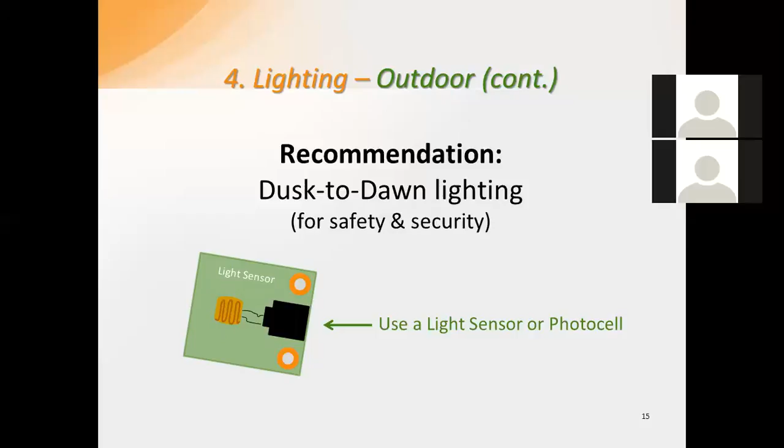Nowadays you can buy outdoor lighting fixtures with built-in photocells and LED lights in many hardware stores, which makes it easy to upgrade. On the other hand, lights used for appearance or informational purposes don't necessarily need to run all night.

Here are some examples of those lights: lights to highlight your outdoor signs, your steeple, your stained glass, which again is beautiful. But if we can conserve the amount that we run them, in my opinion, it makes sense.

We strongly recommend that you control this piece of lighting with a timer, and then adjust the timer. Many of you might have lighting timers, but the thing I see in the field is people, even though they have timers, don't adjust them for time of day changes, and daylight savings time is coming up pretty soon, if I'm not mistaken.

This means this type of lighting rarely needs to be on later than 10:30 at night. Instead of dusk till dawn, you can turn off this type of lighting after a reasonable hour. After you set up your timers, remember to adjust them every few months based on daylight savings time.

So let's see if you listened. I can finally see the chat and the Q&A. Hallelujah.

Question: regarding retrofitting, lights are typically on for 15 hours a day, more than 15 hours a week, or more than 15 hours a month? Let's see if you guys have been listening or if anybody fell asleep. Good job, B, 15 hours a week, you were listening.

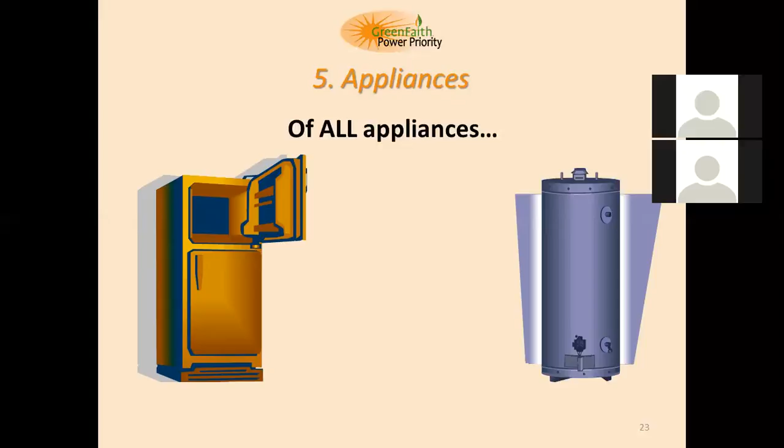Among all the appliances in your buildings, it's your refrigerators and your water heater that will provide the greatest opportunities for energy savings. Which of these is more critical will depend on your facility, specifically how many units you have. For instance, some congregations here in the United States have food pantries, and in that situation they'll probably need half a dozen or more refrigerators to store all that food. So for them, refrigerators would be the critical appliance issue to address.

All right, so now let's first talk about refrigerators. They are such a significant energy user in faith-based institutions because they're running pretty much all the time, 24/7. One of the most important things you can do with your refrigerators, if you have more than one unit, which is often the case, is to consolidate the contents into just one refrigerator or as few refrigerators as possible, and then shut off the others until they're needed again. This very simple action will save you a lot of energy.

All right, here's another tip to help your refrigerators work more efficiently. The first thing you want to do is make sure to move them away from the wall, at least 3 inches away.

And then you would want to vacuum the dust from all the coils and vents every year. The reason for this is simple: refrigerators dissipate their heat through the coils in the back and bottom of the unit. When you keep those clean, you provide more airflow, and the heat can dissipate more easily, so it operates much more efficiently.

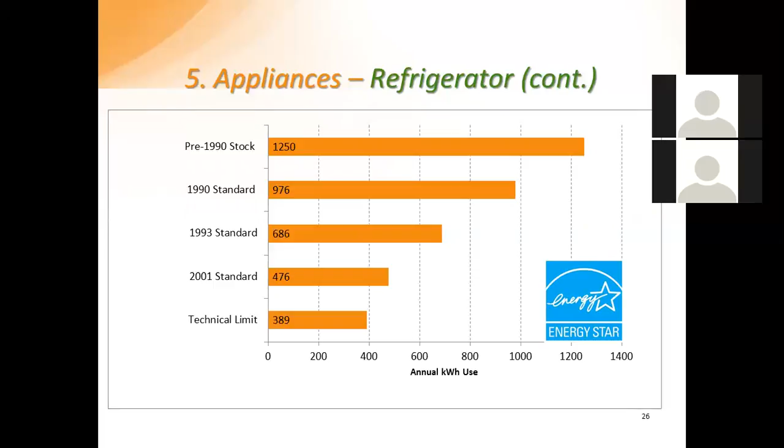All right, so now let's talk about your water heater. Water heaters also use a lot of energy because they run all the time. You may not realize that, but they're constantly turning on and off to keep the water at a constant temperature. We're going to look at two strategies you can use to save energy with your water heaters.

The first thing to look at is the temperature setting. What we find is that in many, many congregations, the water temperature is simply set too high. Our recommendation is that you should keep the temperature no higher than 110 degrees. There are a couple of exceptions to that rule, though.

First, some congregations may provide showers, and if that's the situation, you would want to keep the temperature at 120 degrees. Many churches also have preschools, and there may be specific state regulations you have to comply with, so you need to find out what those are. But for everybody else, the recommendation is to lower the temperature of your water heater, and that'll save you some money.

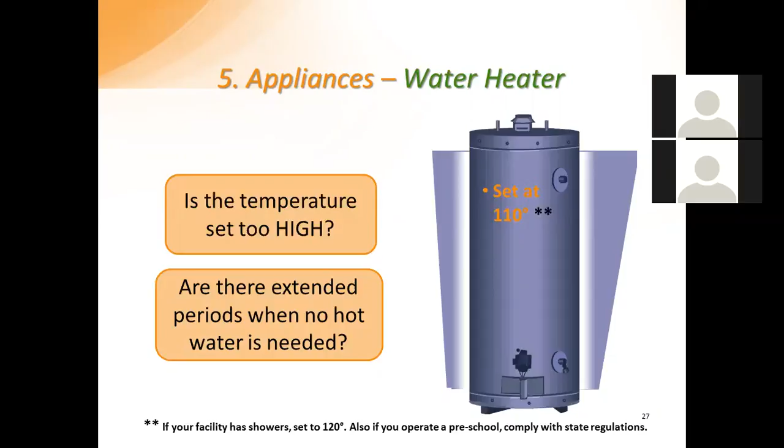The other trick is to use vacation mode whenever you can. We find that quite a few religious facilities have days during the week when they don't really need hot water, because there aren't a lot of people using the facility. If that's the case, you'd want to put the water heater on vacation mode during those days, say Monday to Friday, and then turn it up again for the weekend when people come for services and there are more people using that hot water.

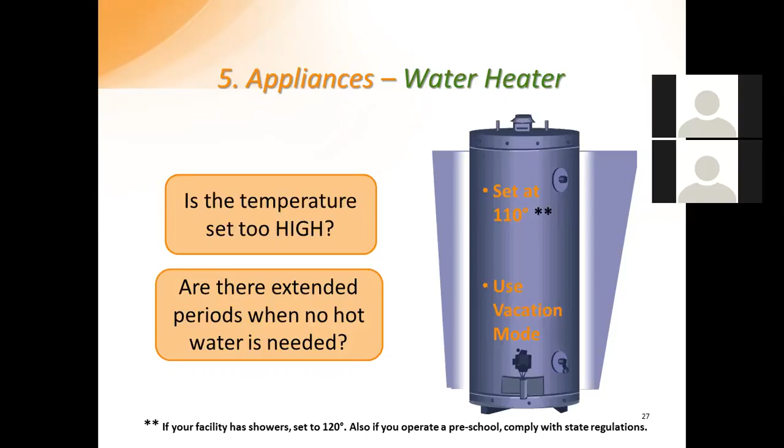The third issue to look at with water heaters is the size of your unit. Is your water heater 40 gallons or larger? We see that quite a bit at houses of worship—some have 80-gallon water heaters, which is typically unnecessary because the need for hot water is fairly limited. The reality is that you probably only need a unit that's about 15 to 30 gallons.

If you have one of those bigger units, you might want to consider replacing it with a smaller water heater. Or the other option is to install an on-demand, or tankless, water heater unit. These units only heat the water when it's really needed, and a lot of times they're very small and located close to the point where you need the hot water—for instance, under the sink in your kitchen. And these really work very effectively.

One of our colleagues at GreenFaith installed a tankless water heater at her home, and she said she saw very substantial savings on her gas bill. So they really do the trick—they do save you a lot of energy on water heating.

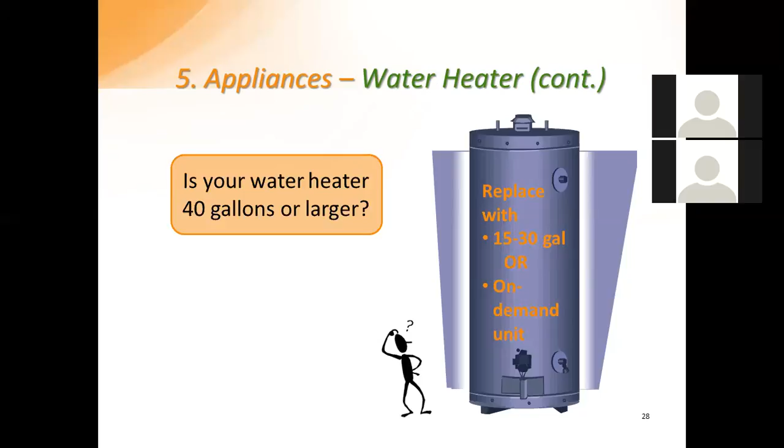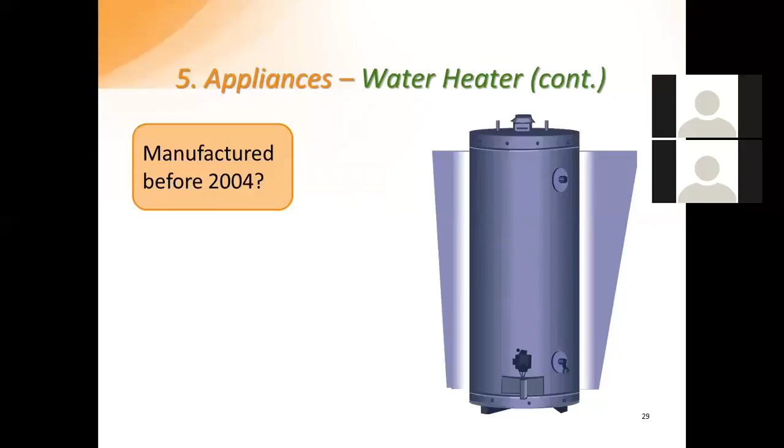And then there's a couple of other suggestions we want to make regarding your water heaters. If you happen to have a water heater that was manufactured before 2004, you'd want to cover it with an insulation blanket. Those blankets you can find at pretty much any hardware store. Newer water heaters have already insulated tanks, so this strategy is not necessary for those.

But our other suggestion applies to all water heaters, and that is that we recommend insulating the first 3 feet of the heated water out pipe. This is especially important if your water heater is located in a cold, unconditioned space, so it has to work a lot harder to keep that water hot.

The purpose of both of these strategies is basically to make sure that you're not losing too much heat from your water heater to the surrounding area, so you keep that water as hot as possible and maximize the efficiency of your unit.

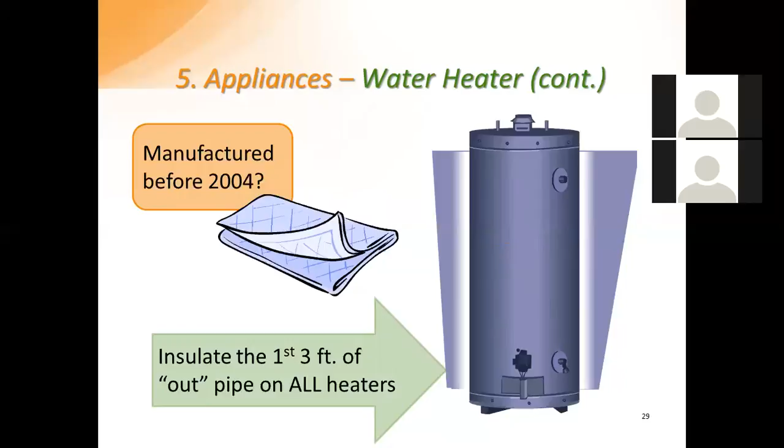All right, so now let's move on to the last appliance topic, and that is vampire load. I wonder if you know what vampire load means.

Basically, it's the electric power that is used by some appliances when they are in the off or standby mode. A very good example of vampire load is our phone chargers. Your phone charger is plugged into the wall, and it may be warm, and you may see that charging light burning even if it's not connected to your phone, so it's not really doing its job. This is a sign that the charger continues to draw energy from the plug even though it's not connected to the phone and not doing the work it's supposed to do.

And of course this is a problem because it can really add up over time. The USA Department of Energy estimates that a whopping 75% of the annual electric power used for appliances is actually consumed when those appliances are in that off or standby mode. That costs us $4 to $8 billion annually, so that's a pretty substantial footprint for vampire load.

So you might ask, is there anything we can do to avoid this? What would be the solution to avoid vampire load? I'm not going to ask you to answer that in the chat box because unfortunately I'm not able to see your answers, so I'm just going to continue.

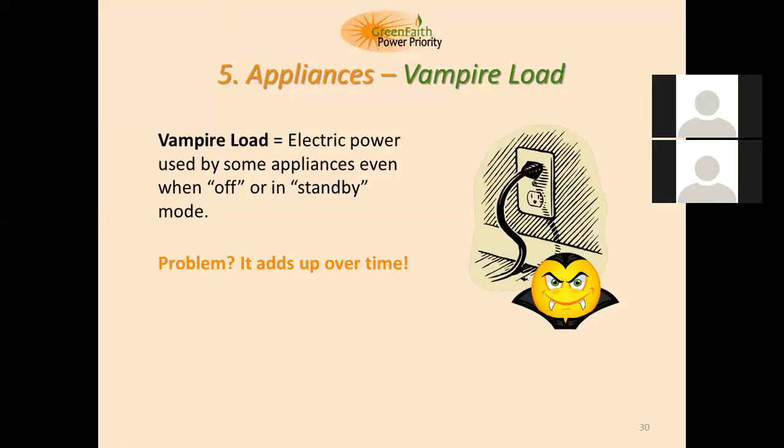Maybe you might have guessed the response, but the right answer here is that we can use power strips. The benefit of using power strips is that you can plug multiple appliances into them, and then turn them all off by simply flipping that one switch, turning all of the appliances off at once.

Power strips are really great in areas of your building where you have clusters of equipment, and we would recommend them in your administrative offices, both for your staff and clergy people. In your admin offices, you probably have a lot of computers, copiers, printers, fax machines, and stuff, so power strips make a lot of sense in those spaces. They may also be good in your kitchen to control your kitchen appliances, and sometimes also make sense in your sanctuary, especially if you are using a lot of audio equipment during your services.

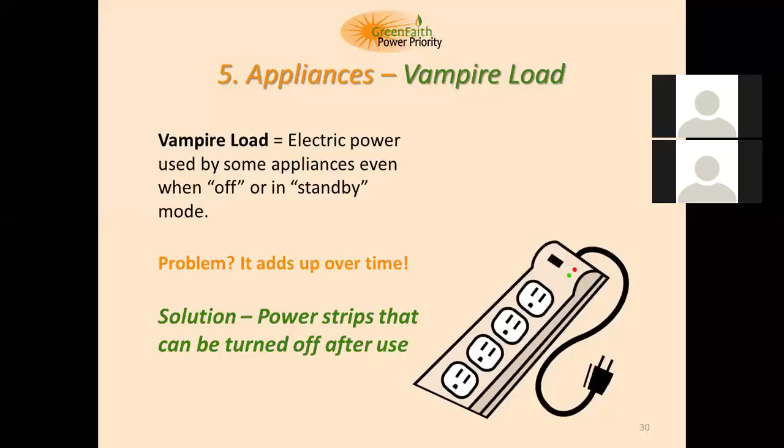Before we finish talking about appliances, I'm going to talk just briefly a little more about Energy Star certification. When Colby talked about LEDs, he talked about Energy Star and recommended that you all buy Energy Star rated LED bulbs because they're going to be much better quality and all kinds of good things. This really applies to all of your appliances. You may already be doing this at home, but you should also consider doing this in your religious facilities.

So Energy Star is actually the highest efficiency rating for appliances. We want to favor those appliances that have Energy Star rating because they use less energy, and they do that without sacrificing the performance of that product. So do remember Energy Star appliances because they help you conserve energy, provide cost savings, and those products work really well too.

Okay, so that concludes the appliance section. And we're going to do a quick recap question around this and see what you remember.

The question is: to reduce the amount of energy used by major appliances and office equipment, what are the 3 changes a typical religious institution should focus on first? The options are: A, consolidate contents of multiple refrigerators into fewer units; B, purchase energy-efficient copiers and printers; C, turn down the temperature on water heaters and use vacation mode whenever possible; D, use power strips to turn off computers, office equipment, kitchen appliances overnight; E, use larger, more efficient water heaters; or F, replace older refrigerators with Energy Star models. So just think about those options, and now let's look at the right answers, Colby.

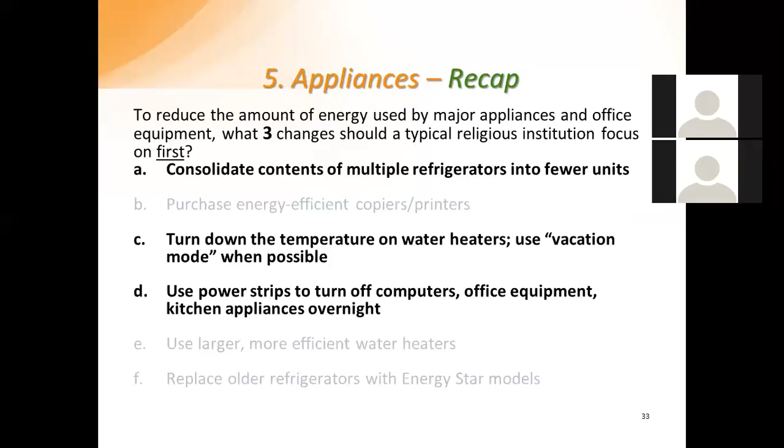Now I'm not going to stop for questions. I think I'm just going to keep going, and we'll have questions at the end. We're going to talk about your building envelope next, and that's really the major last energy savings piece that we will talk about today.

I just want to show the definition of what the building envelope means here. Basically, it's the physical separator between the interior of a building and the outdoor environment. There's a lot of pieces that make up your building envelope—things like your external walls, your windows, your doors, your roof, as well as the floor of your building. We certainly hope you're doing a better job with your building envelope versus what you can see in these two pictures here.

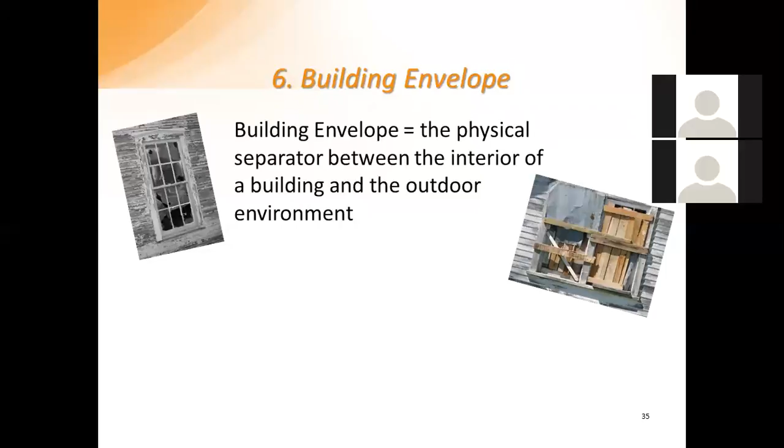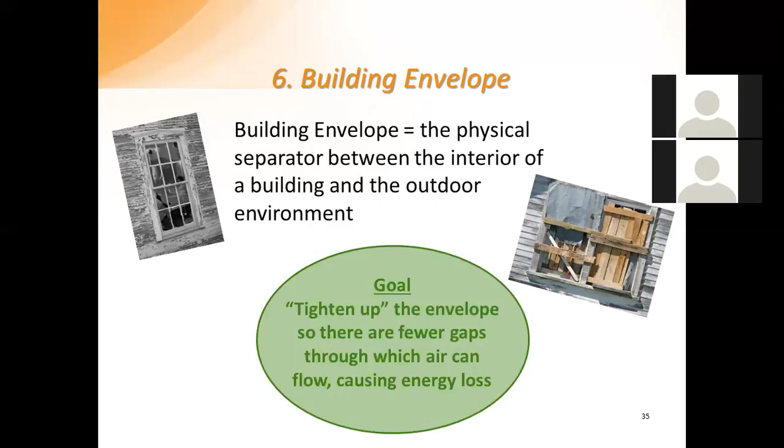But for all of us, the goal is to tighten up the building envelope, so we want to close those gaps through which air can flow, which causes lots of energy losses. So now, what do you think is the top priority for tightening your building envelope in a religious institution? You can think about that for a little bit before we get to the answer.

Well, we know that the answer is not new windows. We get that quite a bit when we talk to religious institutions, especially here in the United States—a lot of them are considering new windows to improve their building envelope. It's not the first thing to do. Certainly, we would not tell you not to replace your windows, but it's probably not the first priority action, because new windows tend to be quite expensive, so they have very long payback and provide a fairly small return on your investment.

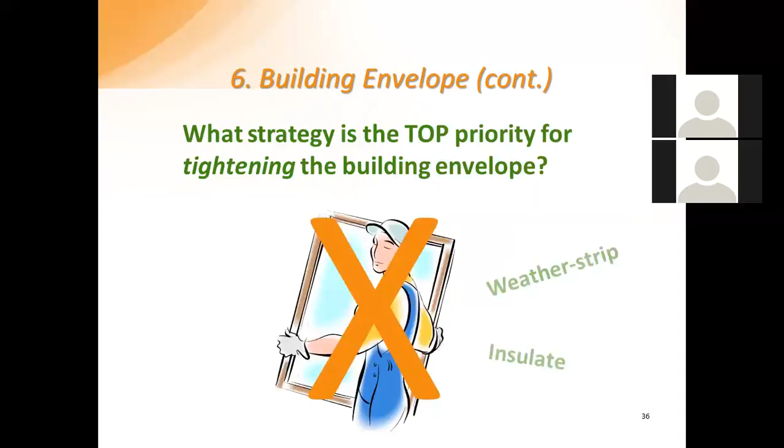We are going to talk about other more cost-efficient methods that are much less expensive to do and get you some really good results, and those are weather stripping and insulating your building envelope. Weather stripping all the windows and ill-fitting doors is actually the most cost-effective action that you can take around your building envelope, and we want to give you a little perspective on the importance of weather stripping.

Our friends at Energy Star basically say that if you added up all the leaks, holes, and gaps in a typical home's envelope—we're talking about a home, not a big building like a religious facility—those holes would be the same as having a window open every day of the year. So imagine that. This is a really big area, and all of those small gaps and leaks in your building will probably add up to a considerable amount, maybe like keeping the door open all year round. So doing weather stripping is a very cost-effective action and a top priority that we really recommend.

We've been around the block quite a bit, and we've seen that drafty windows and doors are very common in faith-based institutions, especially in some of the older buildings, which many of us have. Here we have a couple of very easy tips that you can use to tell if a window or door needs to be weather stripped. So here are some signs for that.

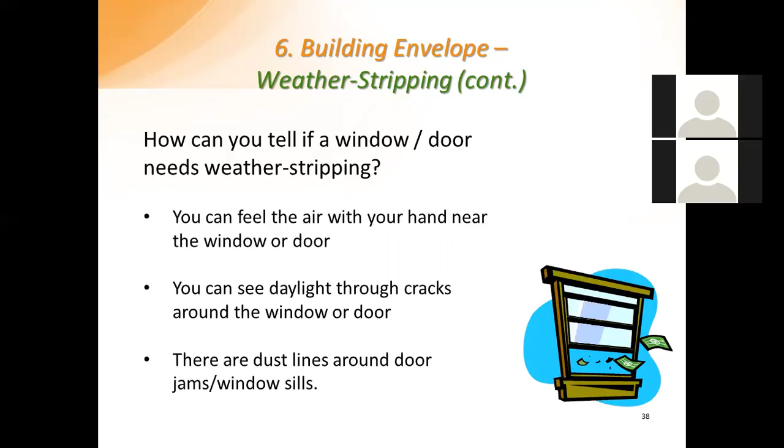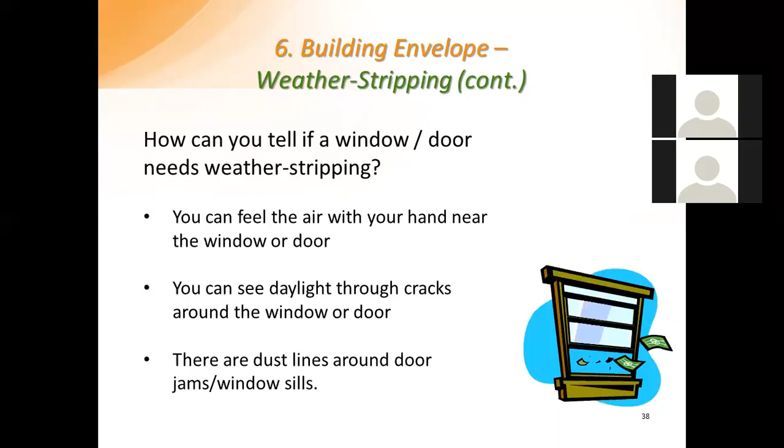In terms of addressing this issue, we recommend that you go to a home improvement store and buy some weather stripping kits meant for windows and other weather stripping materials specifically designed for doors. Both are usually pretty inexpensive. Another suggestion is that you organize a volunteer day, get some volunteers to come in for a few hours, and have them weather strip the entire building. That way the work will go quickly, it's very cost efficient, and people usually can be trained to do weather stripping quite easily.

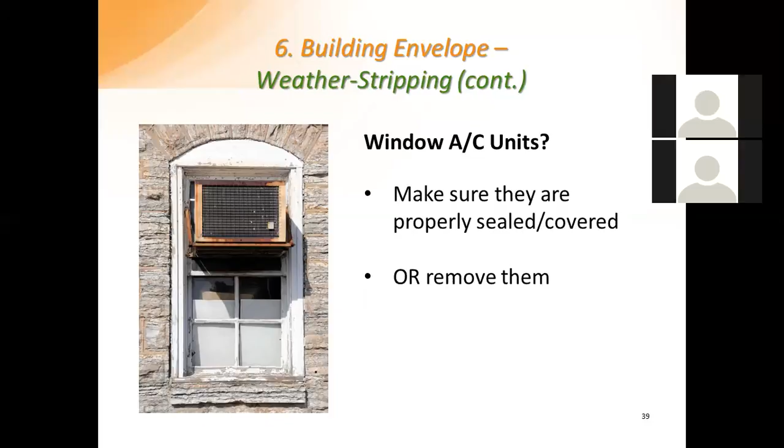The other area that is a very common opportunity at faith facilities around the building envelope is window air conditioning units. You probably have them at your facility, and oftentimes they are left in the windows year round. If that's the case, we recommend that you properly seal and cover them to stop airflow through the unit. But the better solution is to actually remove them, except during the summer months when you use them for cooling. If you leave them in during winter, a lot of cold air comes straight into your conditioned space, and you just have to keep heating that cold air, which costs you more. So remove them if you can.

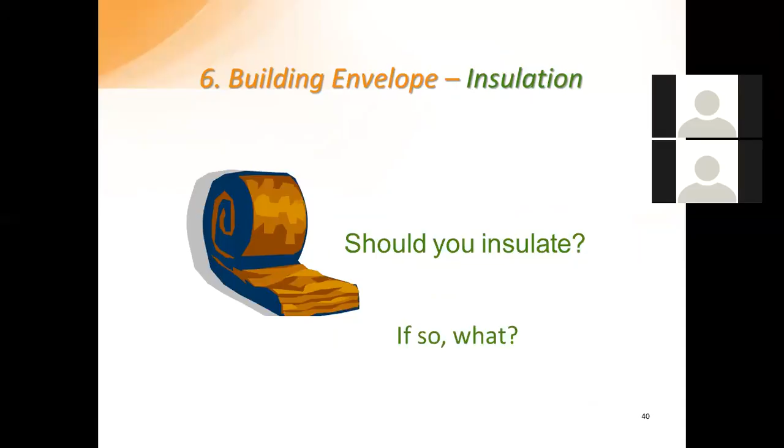The next question is about insulation, and you might be wondering if you should insulate any parts of your building and what area would benefit most. We get this question from a lot of people, and many think insulating the worship space is the top priority. But our experience is that it's often not possible to insulate the sanctuary because of its architectural design. Another factor is that the sanctuary typically has very low usage, so it's not a priority since you're not heating that space as much as other parts of the building. A better solution is to weather strip any leaky windows and doors in your sanctuary. We also talked about aggressive temperature setbacks - our recommendation is to make sure you're not heating the sanctuary when people aren't using it, which is often most weekdays, Monday through Friday.

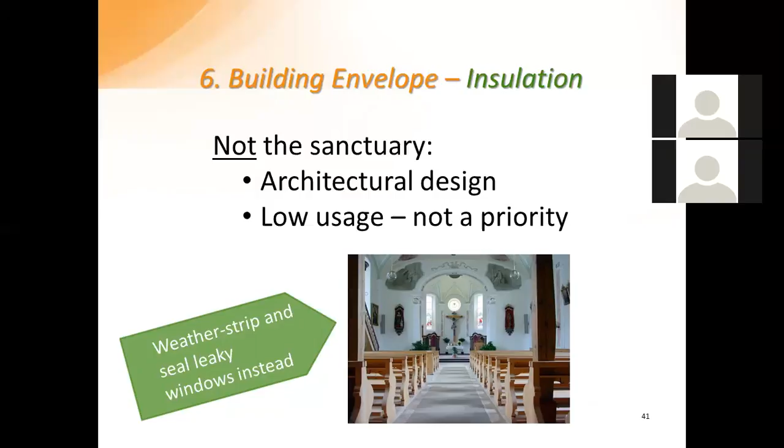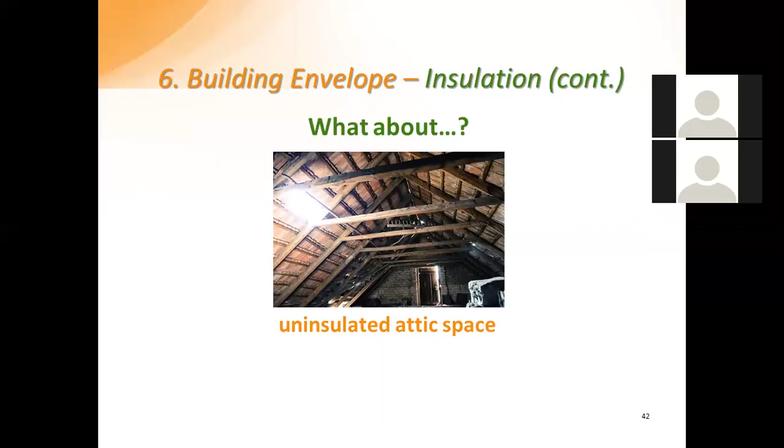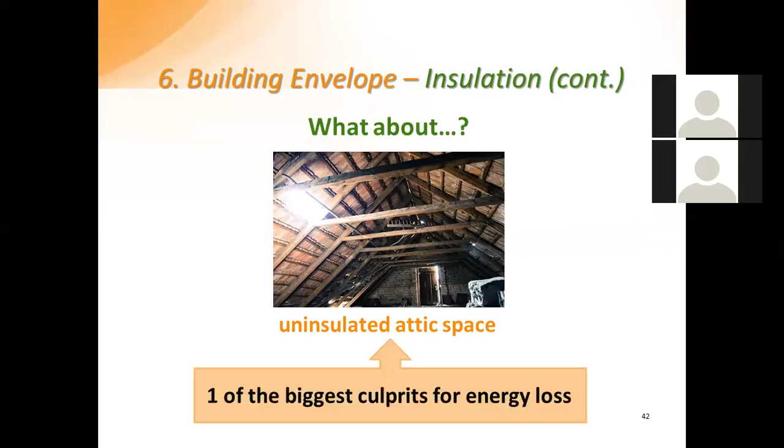So what about your uninsulated attic space? We think insulating that is actually a great idea, because uninsulated attic spaces are often the biggest culprits of energy losses. So if your facility has such a space, definitely consider insulating it. Here we recommend hiring a professional who does insulating all the time - they can help you evaluate how much insulation you need and what's the best product for your particular application, whether it's your attic or another space that needs insulation.